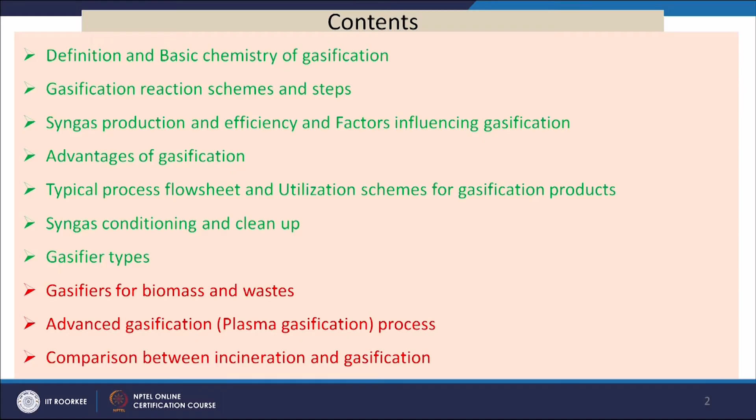In the second part we will discuss gasifiers for biomass and wastes and advanced gasification, that is plasma gasification process, which is very important for processing hazardous solid wastes, and we will make a comparison of different incineration and gasification processes in the second part.

Now we will see what gasification is. Gasification is a process that converts carbonaceous feedstocks into combustible gases including H2 and CO, mainly carbon monoxide and hydrogen rich gas, with a specific heating value, in the presence of a partial oxygen supply, typically about 35% of the oxygen demand of complete combustion, or suitable oxidants such as steam. The produced gas is called synthesis gas or syngas.

But if air is used in place of oxygen, a large amount of nitrogen is also present in the produced gas, and the gas is named producer gas. Syngas can be used for various applications including liquid fuel synthesis through the Fischer-Tropsch synthesis route.

In the earlier module we discussed that incineration (combustion), gasification and pyrolysis are the main three routes under thermal processing of solid waste. In incineration we need excess oxygen, in gasification we need controlled oxygen, and in pyrolysis we do not need oxygen.

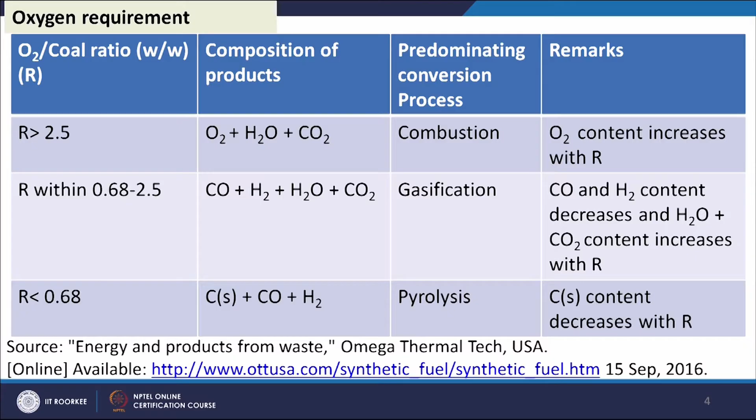So if we put some solid waste with air or oxygen, depending on the ratio of oxygen to feedstock, a particular process will predominate. One guidance is given in the source 'Energy and Products from Waste': for oxygen to coal ratio (weight by weight), defined as R, if R is greater than 2.5, the produced gas will contain oxygen, H2O and CO2, and the process will be combustion.

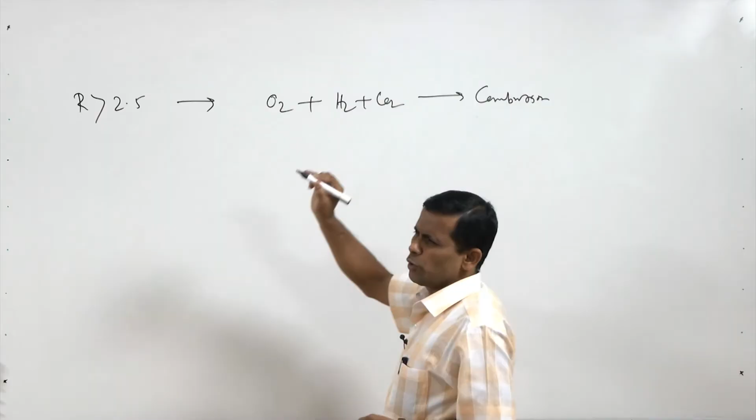Interesting to note that if the R value increases, excess oxygen will also be available in the produced gas. If R is between 0.68 and 2.5, the produced gas contains H2, CO, CO2 and H2O as major components, with possibly other impurities, and this is the gasification process.

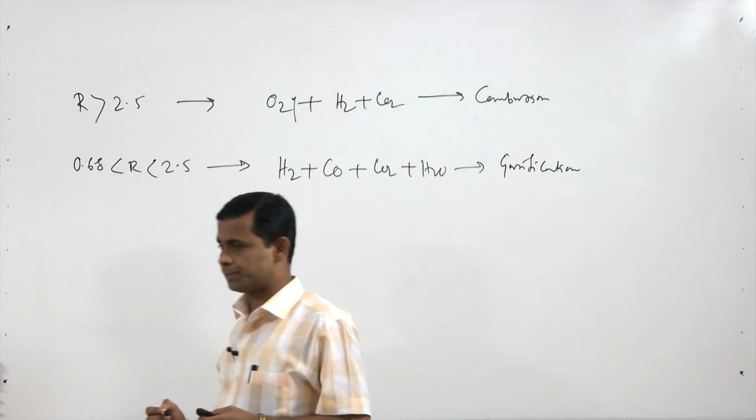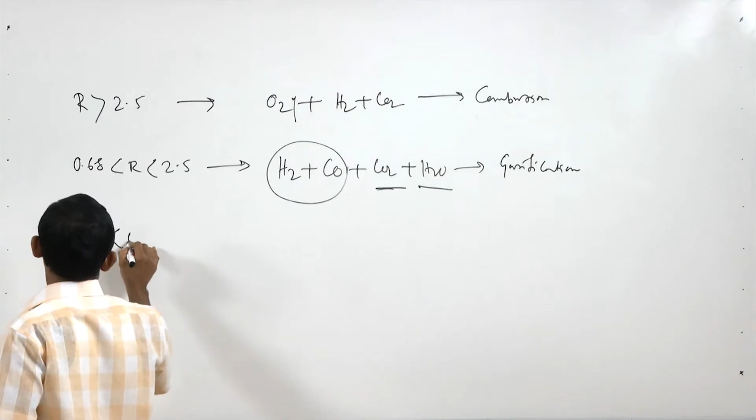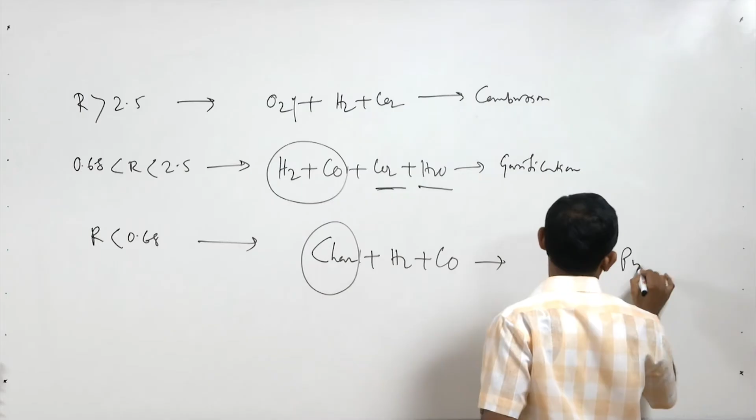Gasification predominates in this range. If we increase R, CO2 and H2O will increase while CO and H2 will decrease. If R is less than 0.68, we will get char along with H2 and CO, and the char yield will increase as R decreases. In this case, pyrolysis is the predominating route for conversion.

Now we will see the basic chemistry of gasification. This basic chemistry involves reactions of elemental carbon present in the feedstock with different agents like oxygen, carbon dioxide, H2O and H2. So carbon will react with oxygen to give CO, with delta H negative.

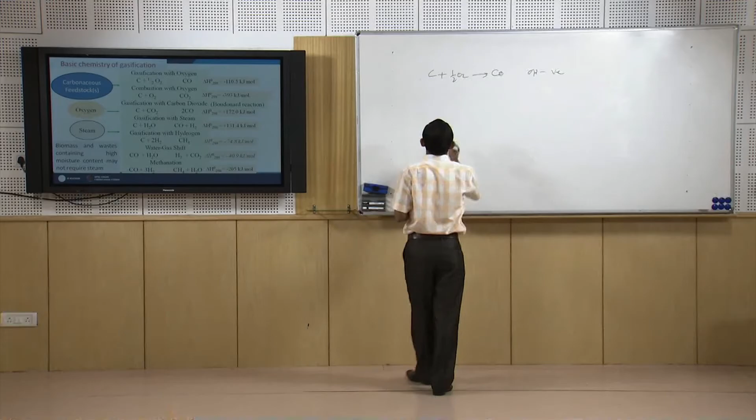This is called gasification with oxygen or partial oxidation. Then combustion with oxygen: C plus O2 gives CO2, with delta H negative. C plus CO2 gives 2CO, with delta H positive. C plus H2O gives CO plus H2, with delta H positive.

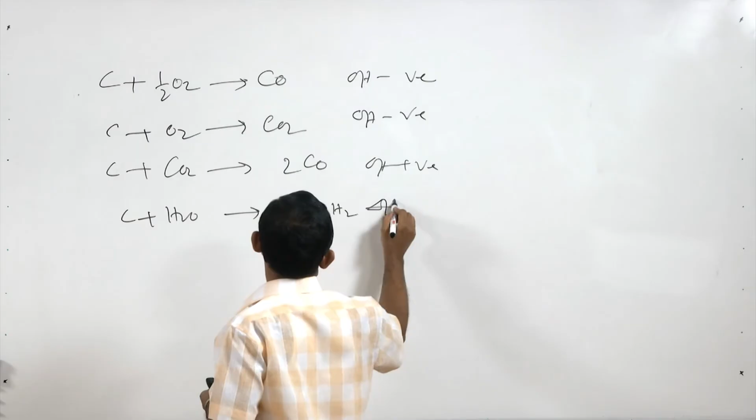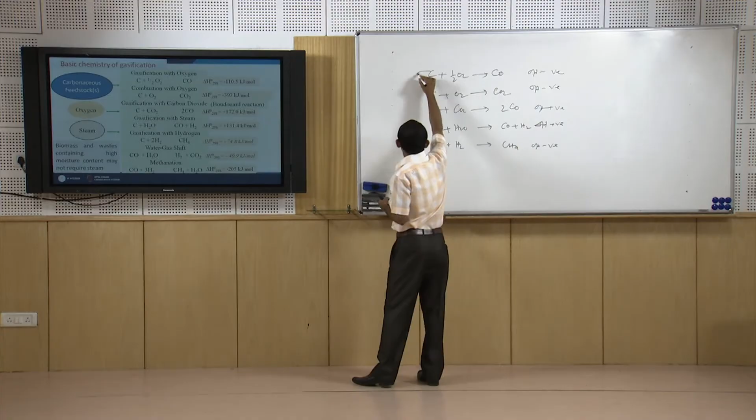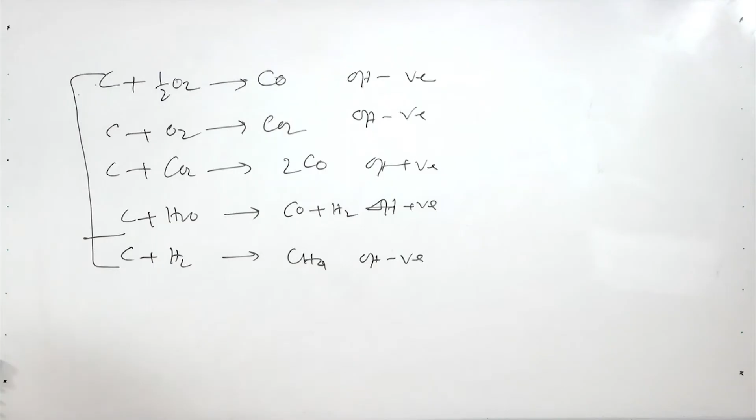Now gasification with hydrogen: C plus H2 gives us CH4, del H is negative. Apart from this, these are the basic reactions - methane formation as a side reaction, and water gas shift reaction also takes place in the gasifier, that is CO plus H2O reacts and converts into H2 and CO2, del H is negative.

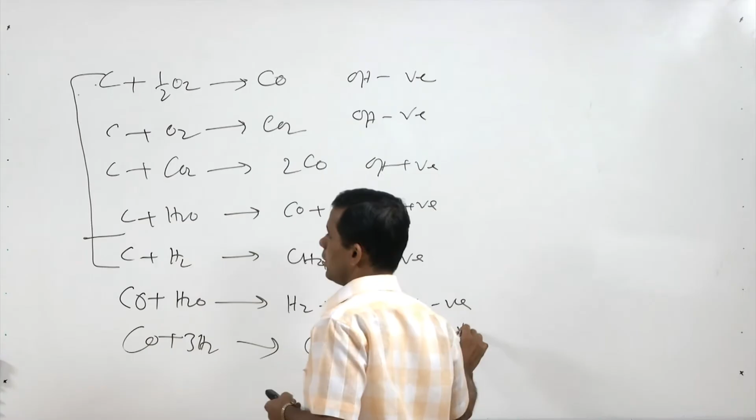Another reaction is methanation: CO plus thrice H2 gives us CH4 plus H2O, del H is negative. So these are the major and minor reactions involved in the gasification of carbonaceous feedstocks in presence of oxygen and steam.

Now, if coal is used where the oxygen is less, then steam is required, because coal also has less moisture. But waste and biomass normally contain higher moisture content and oxygen content, so the steam requirement is less, and in many cases steam is not used at all.

So this is the elemental reaction we expressed when oxygen is used. Now if air is used, the same reactions go on, but additional nitrogen also comes into the gasifier and is present in the produced gas, giving the producer gas. This reduces the heating value of the produced gas and increases its nitrogen content.

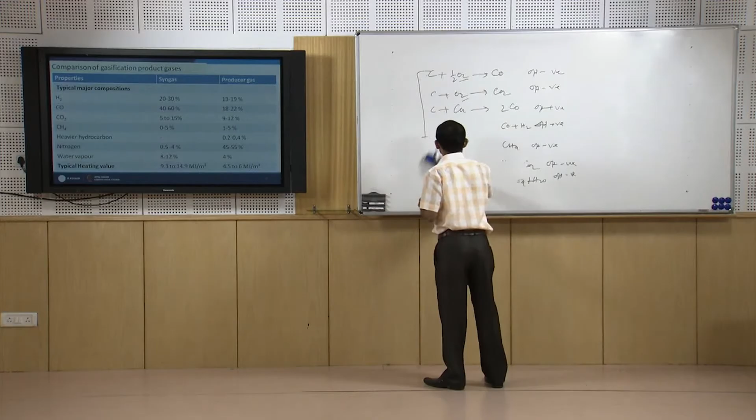Now we will see the difference between these two gases: one is syngas when oxygen is used, and one is producer gas when air is used. If we consider the composition - hydrogen, CO, CO2, CH4, heavy hydrocarbon, nitrogen, water vapor, and heating value - these are the compositions we will compare.

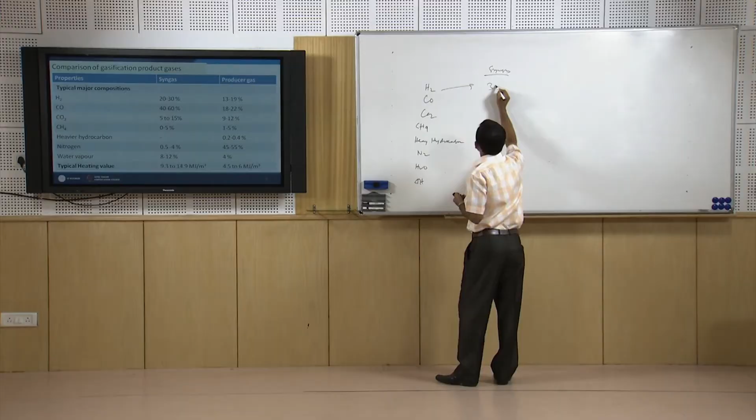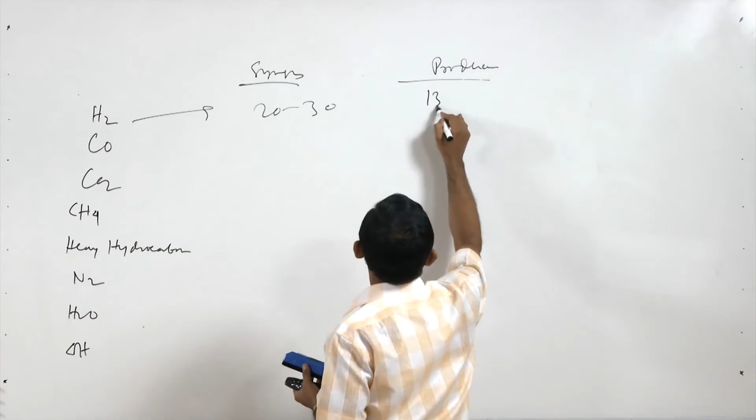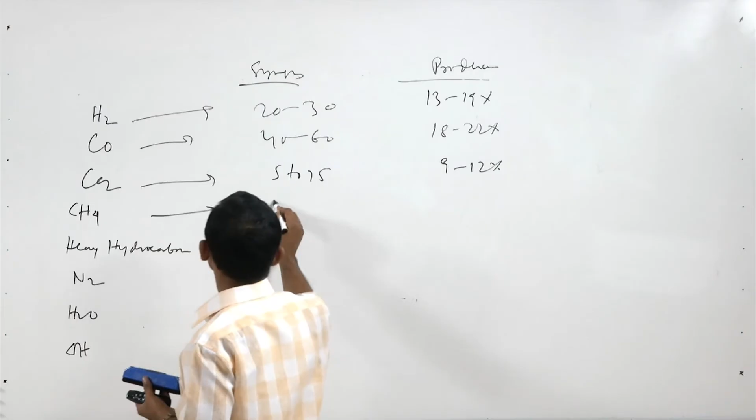For syngas, hydrogen is typically 20 to 30%, and for producer gas it is 13 to 19%. For carbon monoxide this is 40 to 60% and only 18 to 22% for producer gas. Carbon dioxide is also less, 5 to 15% versus 9 to 12%. CH4 is 0 to 5% versus 1 to 5%. Heavy hydrocarbon is 0.2 to 0.4%.

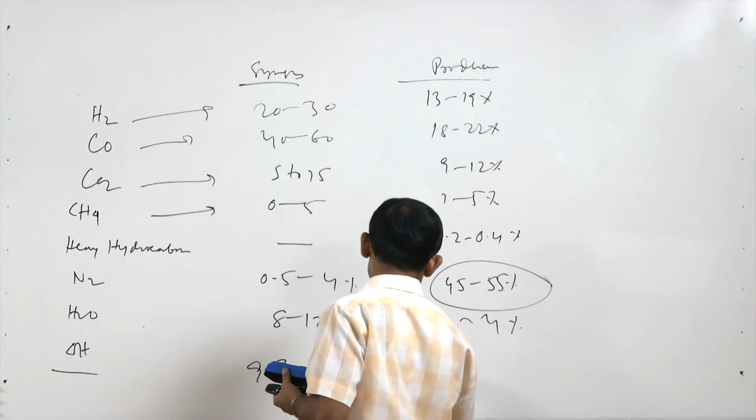Nitrogen in syngas is very less, 0.5 to 4%, but in producer gas it is 45 to 55%. This is very interesting and highly different, this nitrogen content. H2O is 8 to 12% versus around 4%, and the del H value for syngas is higher, 9.3 to 14.9 megajoule per normal meter cube, whereas for producer gas it is only 4.5 to 6 megajoule per meter cube. So the heating value of producer gas is less with respect to syngas.

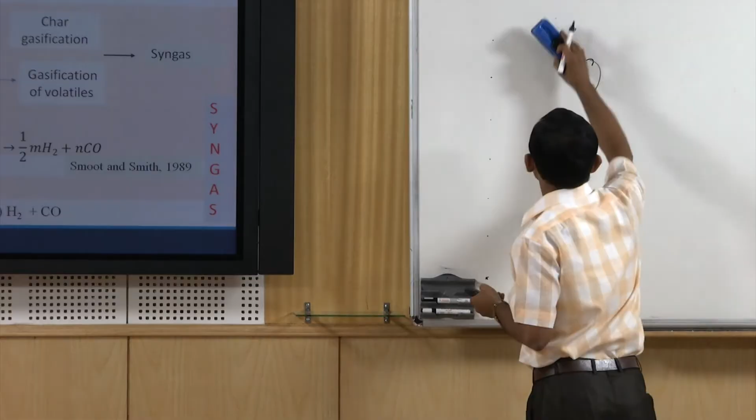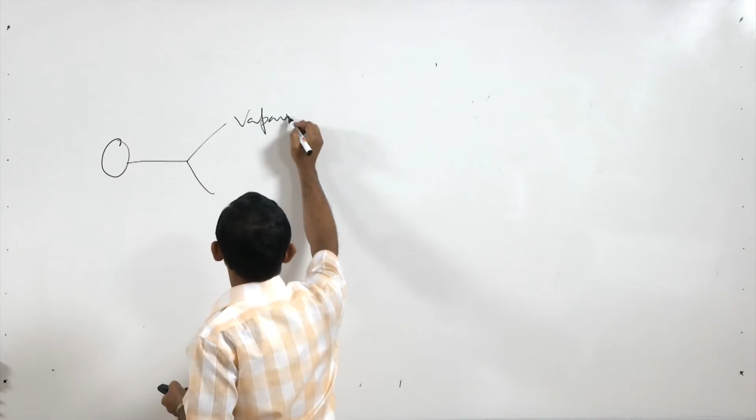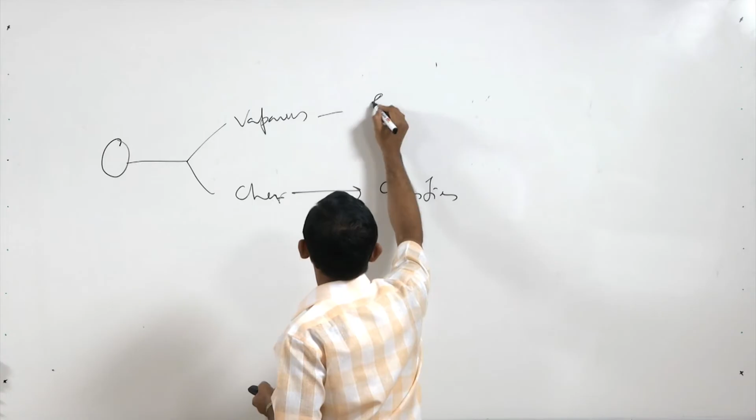Now we will see reaction schemes. So far we discussed very basic chemistry on the basis of elemental conversion, considering only pure carbon with no impurities. Here we will discuss more representative schemes: first the feedstock comes in contact with hot gas, devolatilization takes place giving some vapors and char, then char further gasifies and gives the syngas, with application of heat.

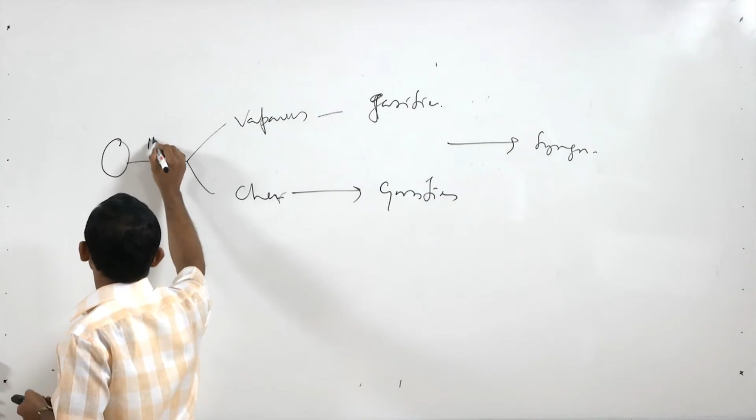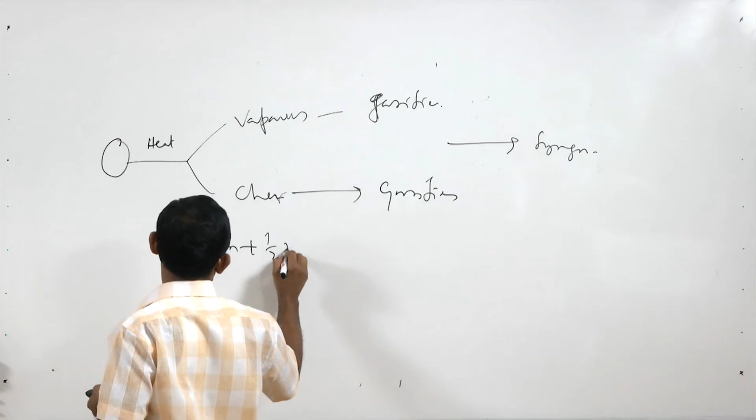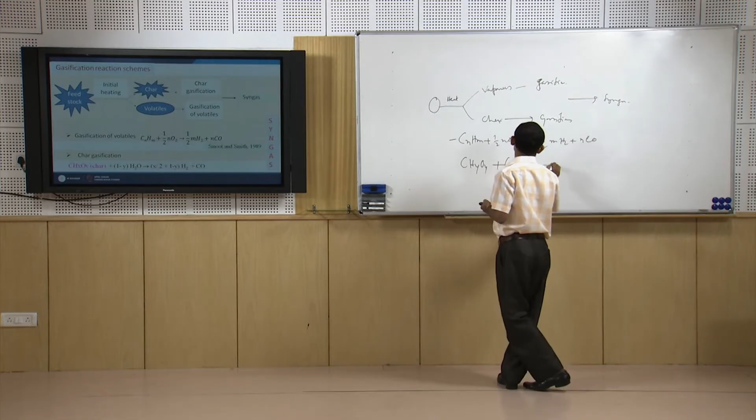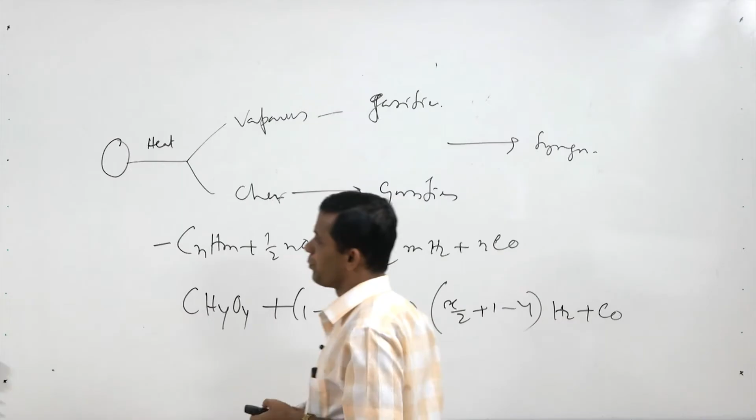Volatiles gasification reactions: for this, CnHm plus half n O2 gives us half m H2 plus n CO. And char gasification: CHxOy, this is char plus (1 minus y) H2O, that gives us (x/2 plus 1 minus y) into H2 plus CO. This was proposed in 1989.

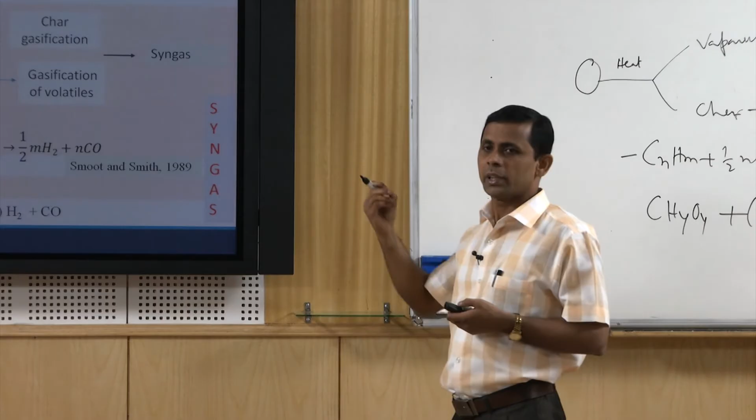A similar phenomenon happens in case of incineration. First the material comes in contact with hot gases and volatilization takes place. In incineration, the volatiles oxidize or combust with secondary air, but here we are not providing any secondary air - only a controlled amount of oxygen is provided, so the reduction or gasification reactions proceed.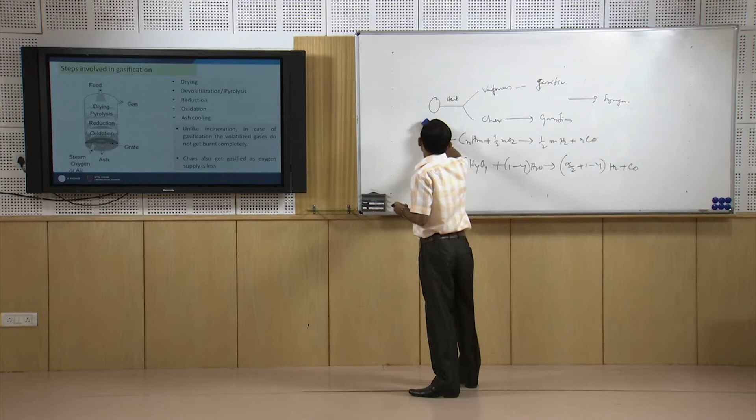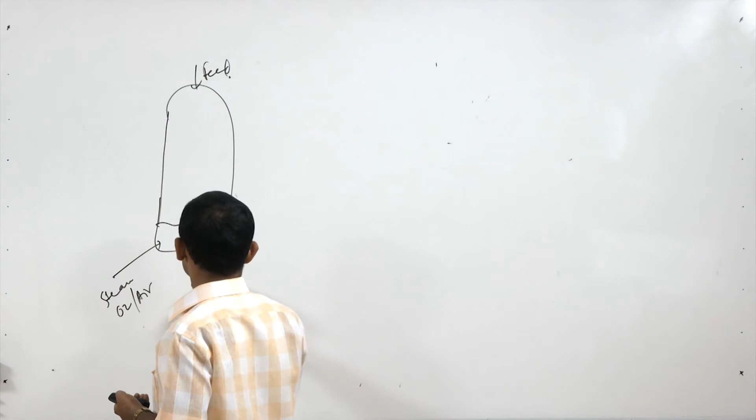If we take a reactor or gasifier, how the different zones are distributed is shown in this figure. Take a fixed bed gasifier: from the bottom we send steam, oxygen or air, from the top we put feed, and there will be a grate where ash is collected. So this material is falling down.

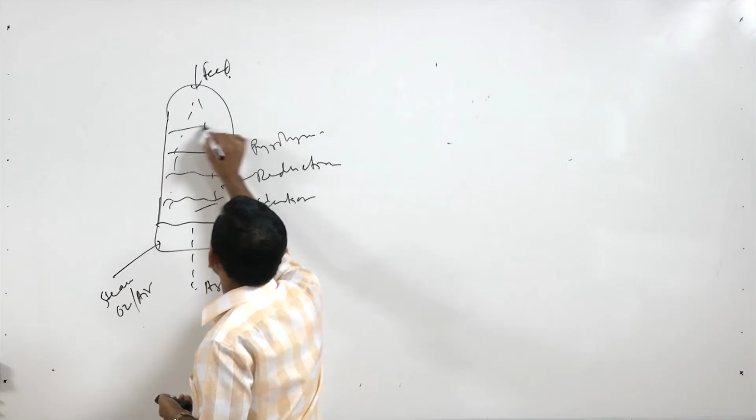There will be a combustion zone - oxidation, the highest temperature - then reduction zone, then it will be having pyrolysis, and this is drying. So these are the processes or regions we get in the gasifier.

This is very similar to incineration methods, but the only difference is that here the vaporized or volatile components do not get completely burned because oxygen is not there, and char gasification takes place in place of char oxidation.

So for what we have discussed, it is not clear how H2S and COS are produced during gasification, which are present in the syngas and cause serious operational issues. Valero et al. in 2006 proposed a chemistry for gasification, presenting the molecular formula of carbonaceous feedstocks and showing reactions with oxygen, CO2, H2O and H2, demonstrating it is possible to produce H2, H2S, N2, CO, CO2, CH4, etc.

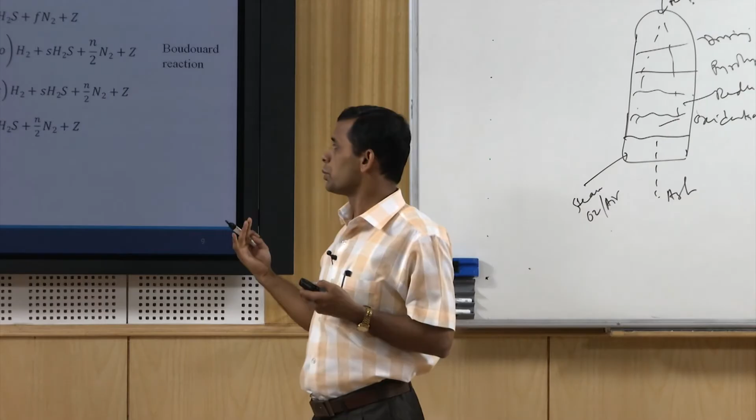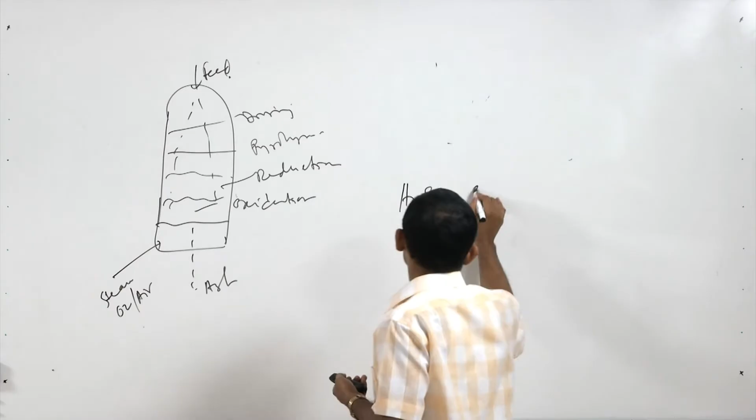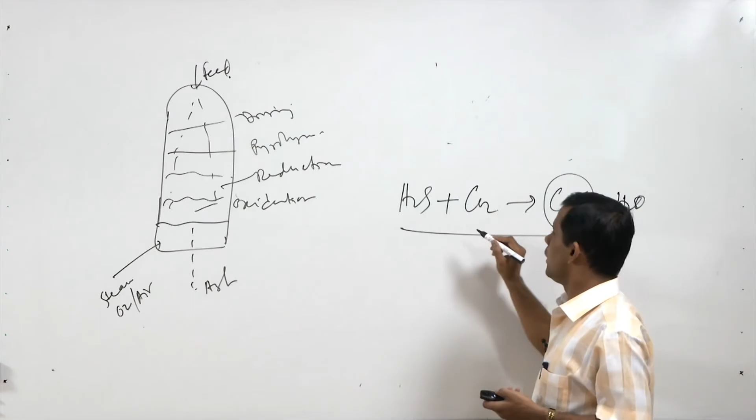It is also proposed that H2S, produced during the basic reactions, reacts with CO2 and converts to COS plus H2O. So this is the reaction through which COS is present in syngas, which requires cleaning because these components are not desirable - we have to remove these things.

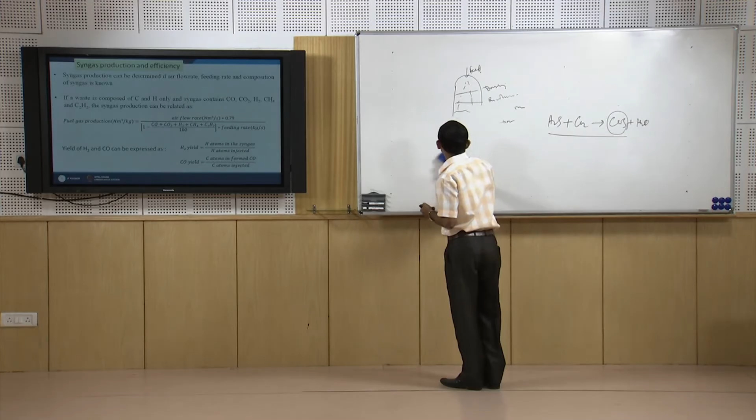Now we will see how we can calculate the amount of syngas produced and the thermal efficiency of the gasification process.

Gasification is a very high temperature process, so it is governed by equilibrium. Through equilibrium modeling and its simulation, we can predict the composition of syngas and the production rate.

Many people have tried to predict the composition. Here is a formula using which we can calculate the fuel gas production rate if the feedstock contains only hydrogen and carbon, and the product gas contains CO, CO2, H2, CH4 and C2H4 - this is fuel gas, syngas or producer gas, whatever it may be depending upon the situation.

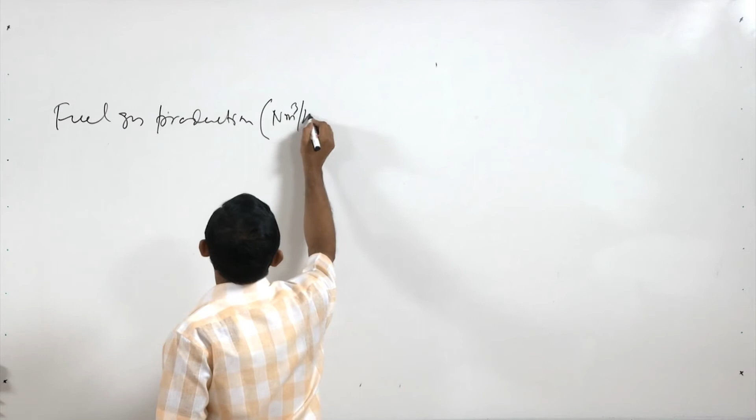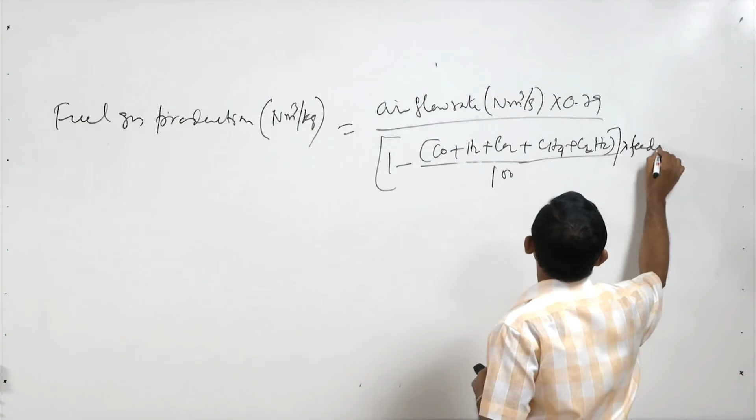So fuel gas production, in normal meter cube per kg of waste or carbonaceous material, is equal to air flow rate in normal meter cube per second, into 0.79, divided by 1 minus CO plus H2 plus CO2 plus CH4 plus C2H2 - this is the composition - divided by 100, into feeding rate in kg per second.

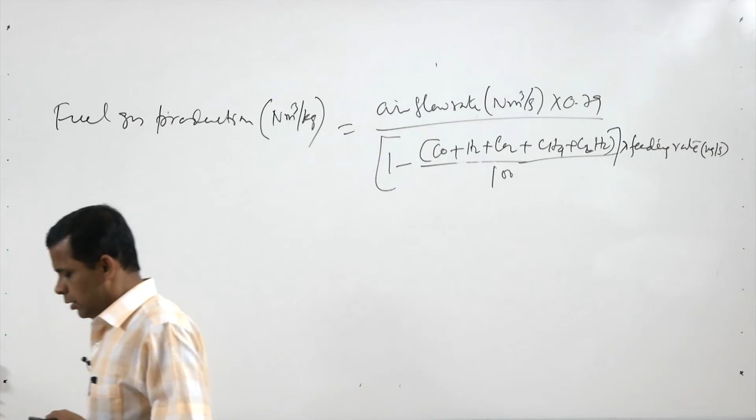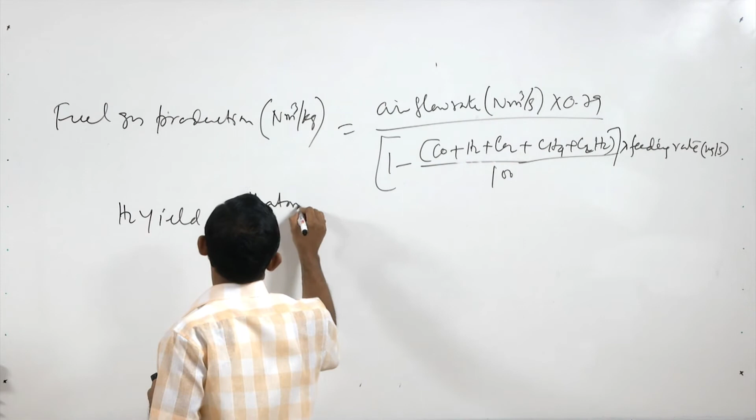Now hydrogen yield and carbon monoxide yield are also two important parameters. Hydrogen yield is equal to hydrogen atoms in syngas divided by hydrogen atoms injected, that is in the feedstock. CO yield is equal to carbon atoms in formed CO divided by carbon atoms injected, meaning in the feedstock.

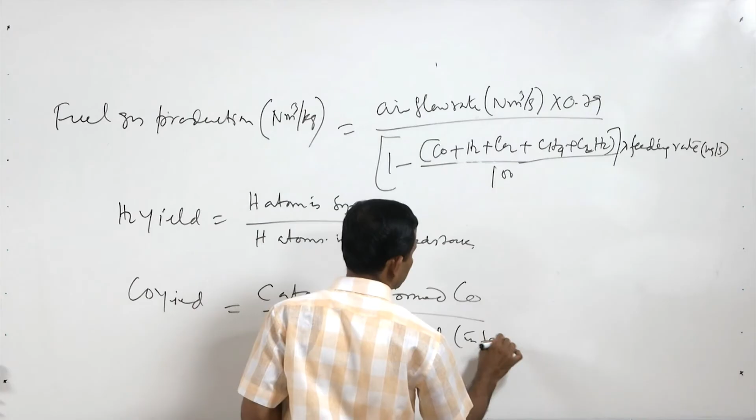So this way we can calculate the fuel gas production rate and the yield of hydrogen and CO. Now we will see how to calculate the thermal efficiency.

Thermal efficiency of this gasification process can be determined as: thermal efficiency is equal to heating value, lower heating value LHV of the produced gas, the cold gas, in kilojoule per normal meter cube, into fuel gas production in normal meter cube per kg, divided by...

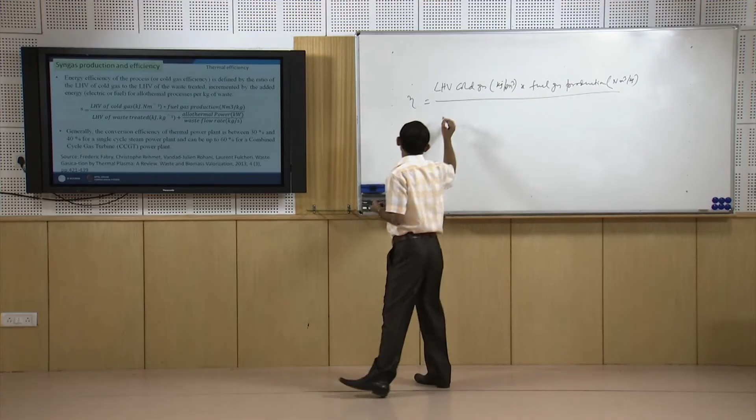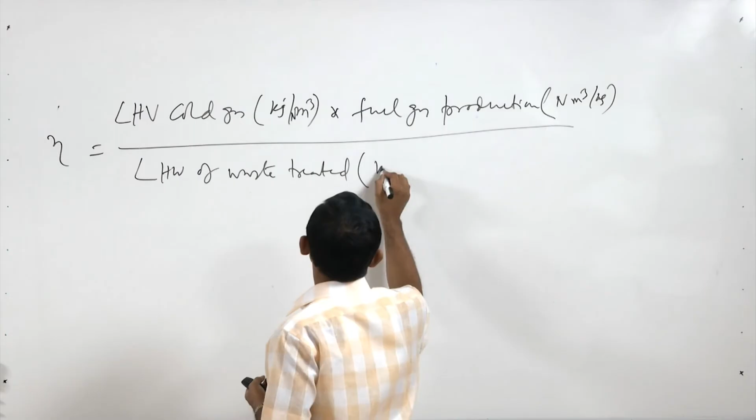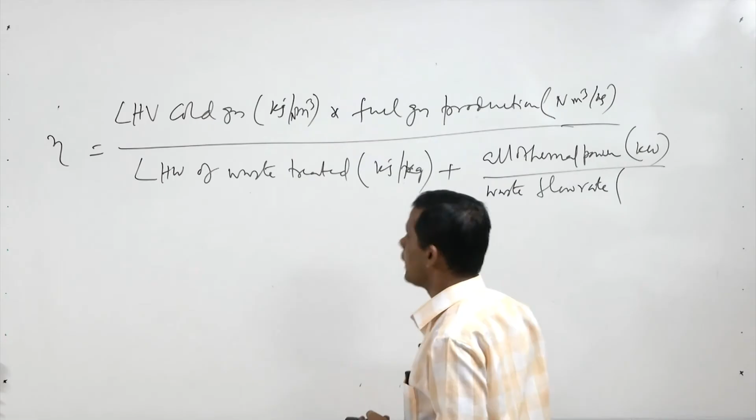...how much heat is available in the waste - that is LHV of waste, in kilojoule per kg - plus additional energy required for the process, called allothermal power, in kilowatt, divided by waste flow rate in kg per second. This is the equation through which we can calculate the thermal efficiency of the process, or cold gas efficiency.

Generally conversion efficiency of a thermal power plant is between 30 to 40% for a single cycle steam power plant, and it can be increased up to say 60% for a combined cycle gas turbine power plant.

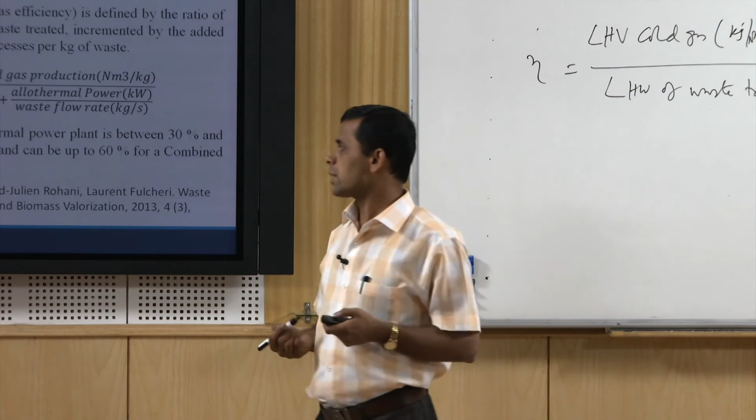Now we will see the factors that influence the performance of gasifiers or the gasification process. In combustion we have seen that time, temperature, turbulence, feedstock size, etc. influence the rate of combustion. Similarly, the performance of gasification will also depend on those parameters.

In addition, the type of feed injection - whether we are feeding from the top or from the side - will also influence the performance. The gasification agent, whether air or oxygen, will also influence the process. The type of heating, direct or indirect, will also influence the type of reactor used, fixed bed or moving fluidized bed, which will also affect performance. Temperature range and pressure are also important.

Now what is the advantage of gasification? This reduces CO2 in the emission, so CO2 emission is reduced. We get some intermediate step to control CO2 emission - this is the one major advantage. Apart from this, it requires compact equipment with a relatively small footprint, accurate combustion control, and high thermal efficiency.

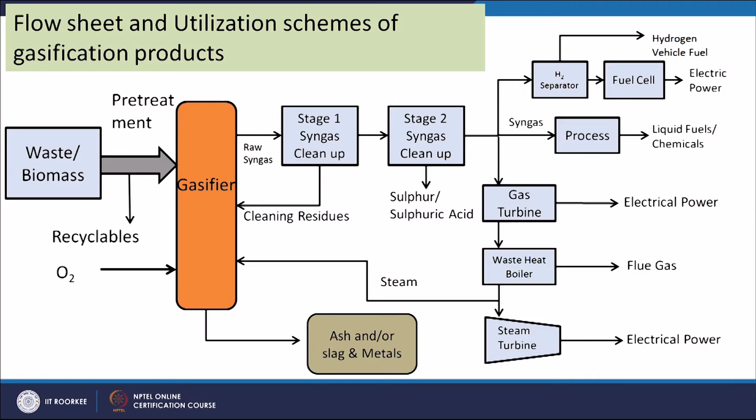Now we will see the flow sheet and utilization schemes of gasification products. Similar to incineration or combustion methods, we use waste, biomass or any carbonaceous material after pre-treatment. If the carbonaceous material is waste and biomass, pre-treatment is a must - segregation, sorting, homogenization is required - and then the material comes to the gasifier.

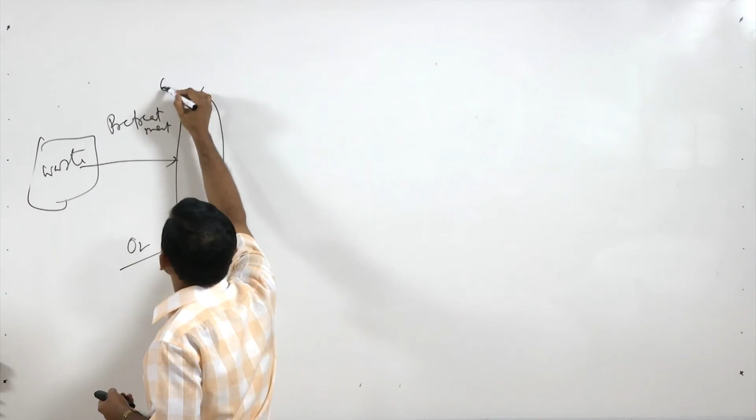So after pre-treatment, the waste comes to the gasifier. The gasifier supplies oxygen or air, and steam if required, depending upon the moisture content in the waste. Then it gives us syngas, but here the temperature is high - varying from about 600 to 900 degrees depending upon the type of gasifier used - and that will go out.

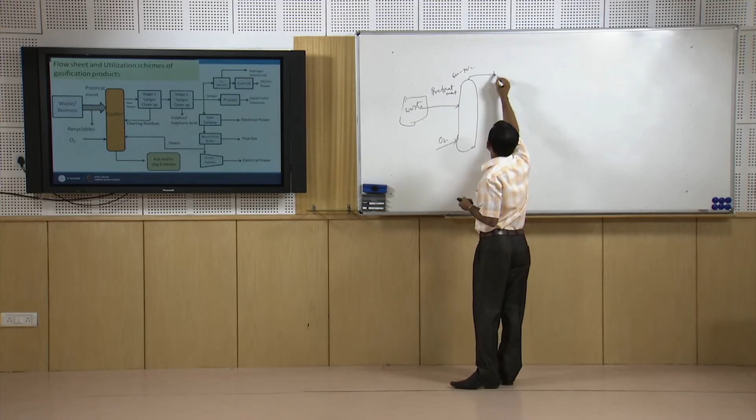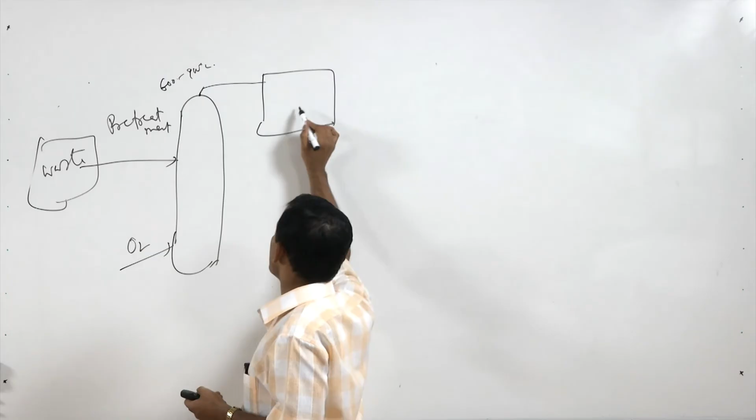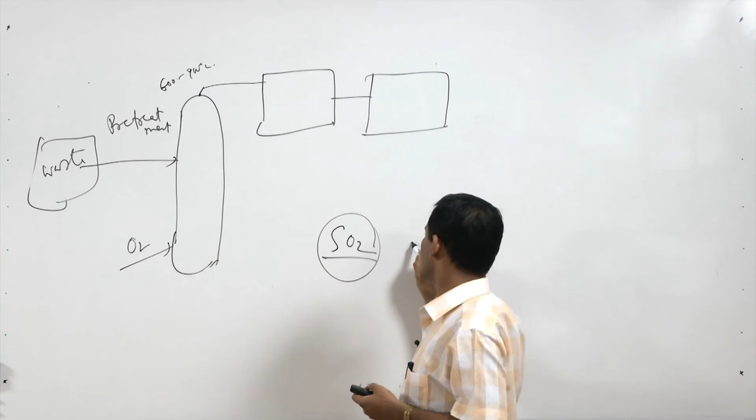We need to clean it. So the first step is syngas cleanup, done using cyclones - particulates carried over are settled down and can be recycled. This is the first cleaning step. Then in the second step we clean the acid gases present - SO2, H2S and COS. SO2 will not be present here, unlike in incineration methods. We will be having H2S and COS, so we have to remove the H2S and COS in this case.

After acid gas removal, we will be getting the syngas. That syngas can be used for different purposes. After the cleaning of the acid gas components from this syngas, this will be ready for utilization. Now, this can be used for various applications.

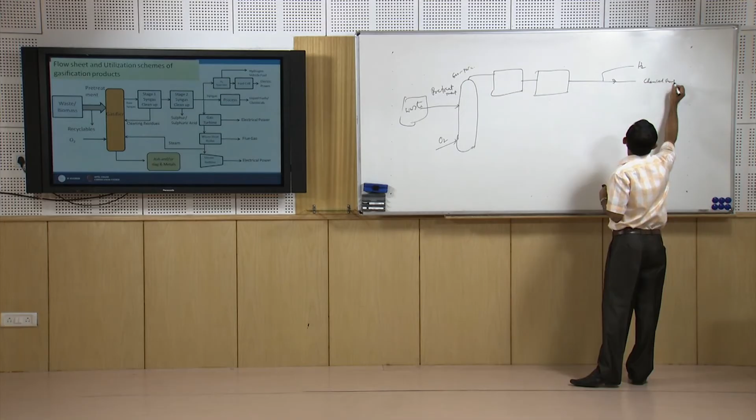It can be used for hydrogen production, it can be used for chemical synthesis, it can be used for Fischer-Tropsch synthesis for liquid fuel.

Then this can directly be used in a gas turbine, so that will give us electricity. Then the gas goes and the heat can be recovered and we use this gas for steam formation, so it will give us flue gas. After combustion it will be steam, water will be converted to steam, and that steam can further be used in a steam turbine.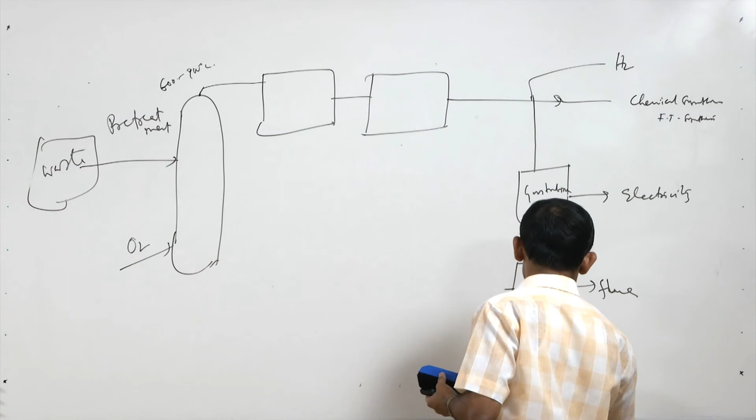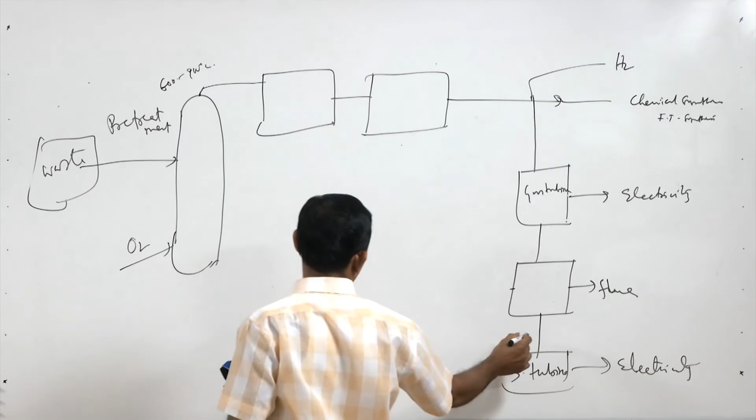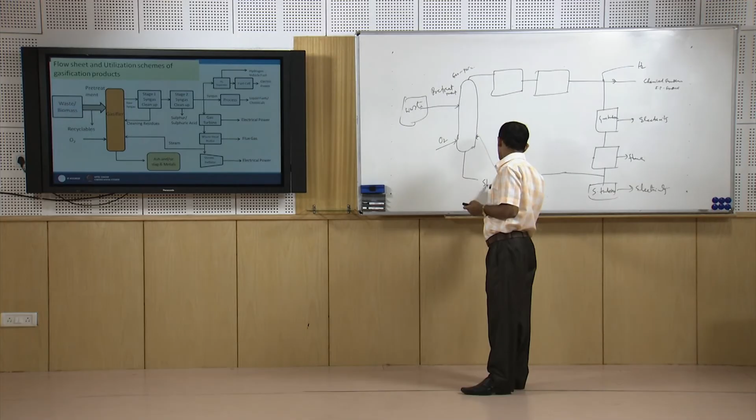Which will again give us electricity. And part of the steam produced here can be used in the gasifier if required, and from the bottom of the gasifier we will be getting the slag and ash. This can be recovered or managed in a proper way.

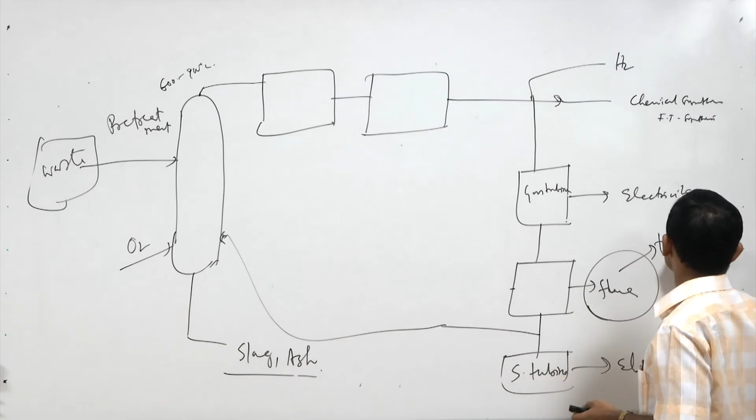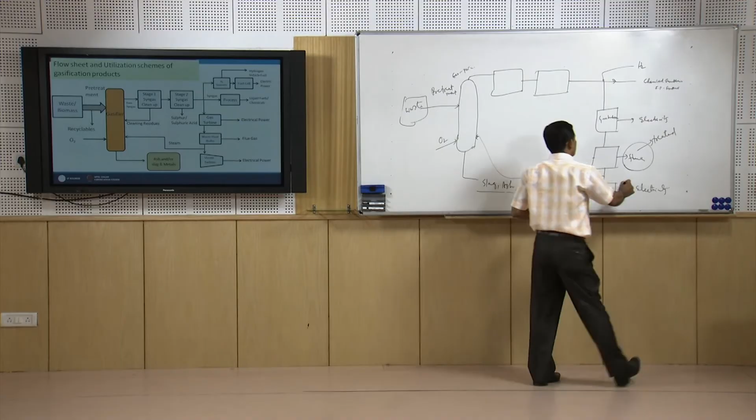Now, this flue gas which is generated here has to be treated, and we will be discussing these things in another module, and we will also discuss the scopes for different applications in detail in another module.

If we think about different applications, three important ones are hydrogen production and hydroprocessing, second is chemical, and third is power production. So power production, hydroprocessing and chemical production are the three major routes for the application of syngas, but for the downstream applications in these three routes, the quality requirement is different.

For power applications, the quality requirement basically on sulfur is that it should be less than 10 to 15 ppm. For hydroprocessing, the sulfur content should be less than 1 ppm, and for chemical this should be less than 0.01 to 1 ppm. So that has to be very pure.

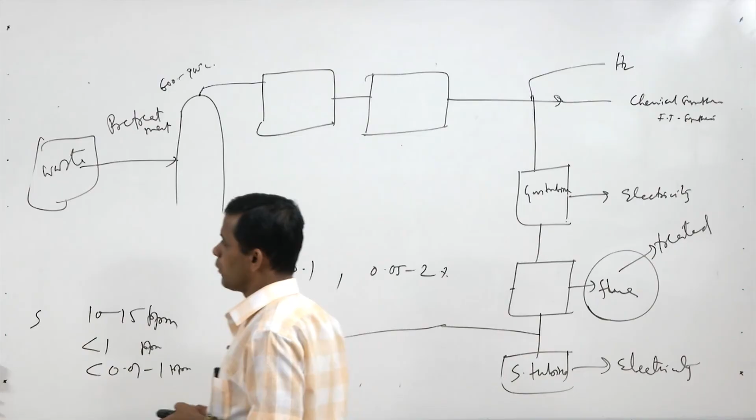But for carbon dioxide and carbon monoxide, for power application there is no limitation, it can have any value. For hydroprocessing, the carbon dioxide should be less than 0.1%, and for chemical it will be within 0.05 to 2%. For carbon monoxide, if it is for hydroprocessing, less than 50 ppm on a weight basis, and for chemical synthesis the CO requirement will depend upon the process, because different processes require different H2:CO ratios in the syngas.

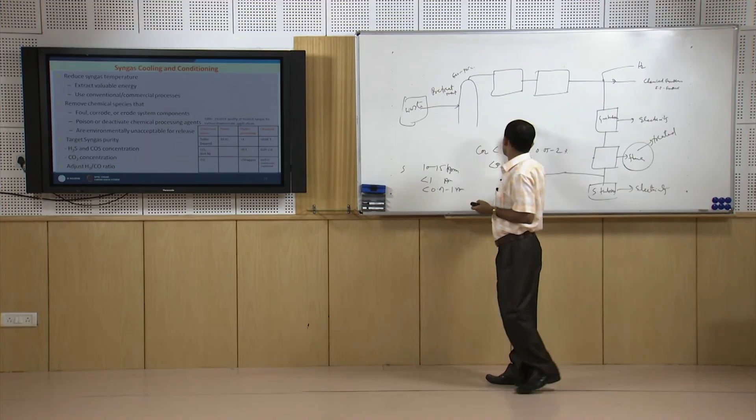Somewhere the required ratio is 2:1, like Fischer-Tropsch synthesis, somewhere it's 1:1, like DME synthesis. So depending upon the nature of the chemicals we are going to produce, the H2/CO ratio is required. To maintain this ratio, we need to condition the syngas.

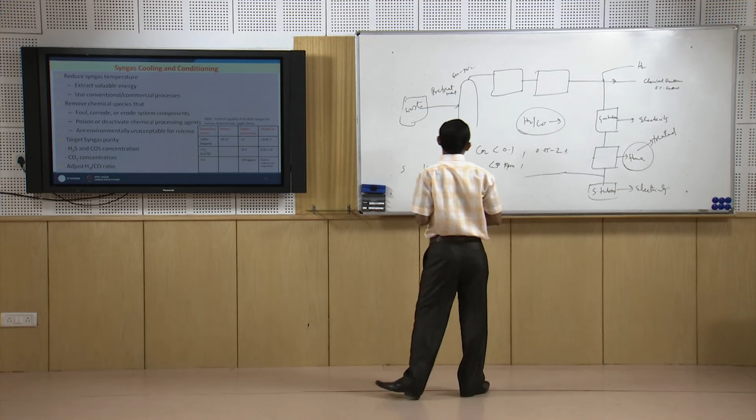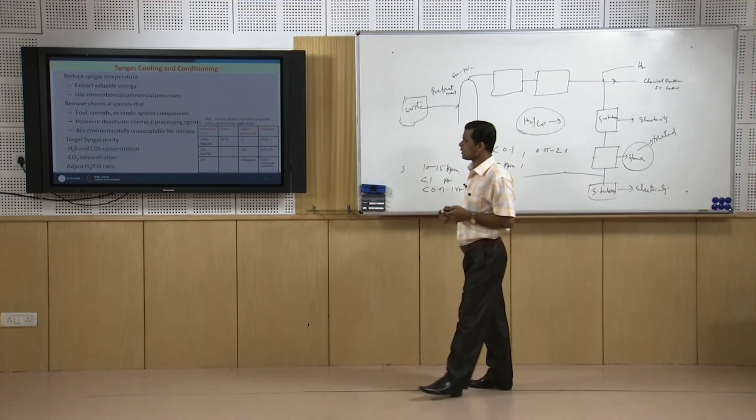That means some other reactions are carried out with the syngas to control the H2/CO ratio, and cooling is required because syngas is at very high temperature, as I mentioned. So for different applications the temperature has to be reduced. This is the flow sheet we have discussed.

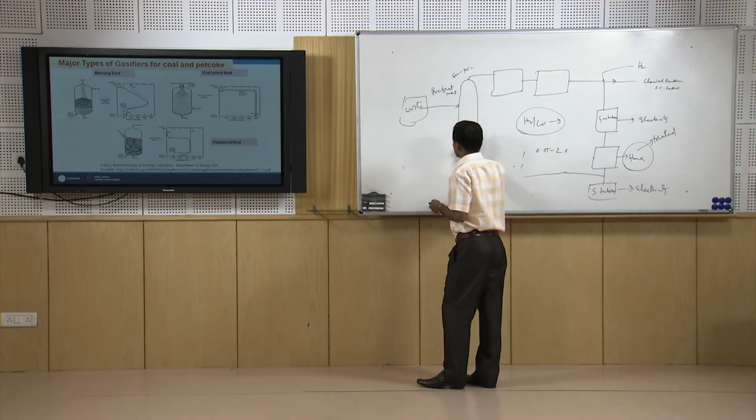Now we will see some important types of gasifiers used in coal gasification: fixed bed, fluidized bed and entrained bed gasifiers.

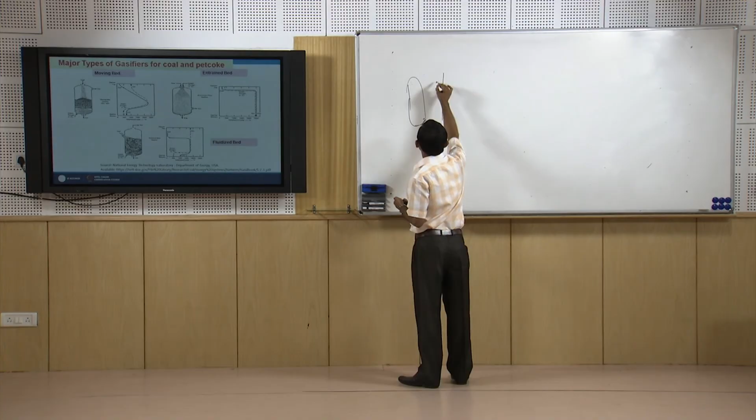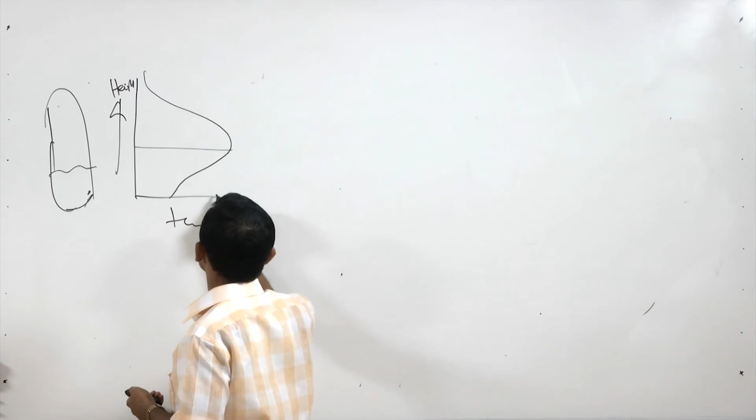If we think about the three gasifiers and look at the temperature distribution along the height for a fixed bed: this is the height of the gasifier, this is the temperature, and this is the combustion zone. The maximum temperature will be here, and that will be reduced elsewhere. This is the ash zone, this is the combustion zone with maximum temperature, around 1800 degree centigrade. This is for fixed bed.

If it is a fluidized bed, material is put in from the side. Here the temperature is less, maximum temperature is inside. So with height, the temperature distribution will be uniform, this part will have uniform temperature distribution throughout.

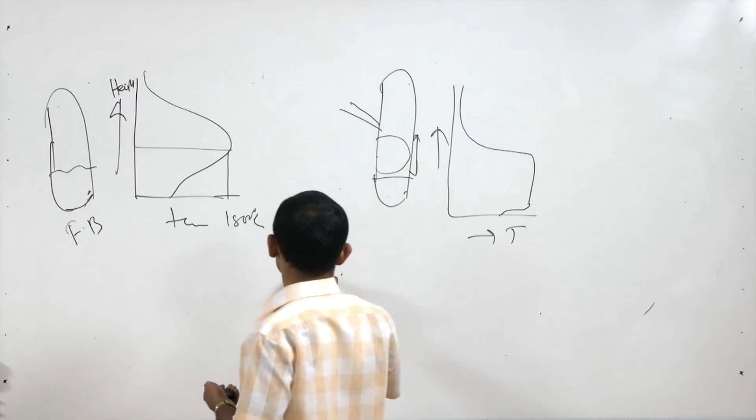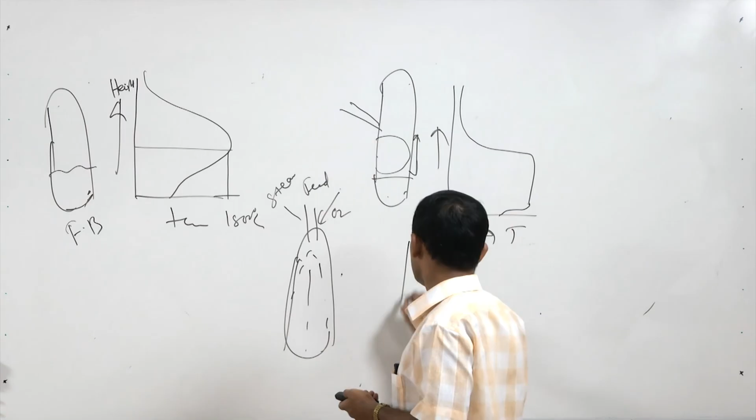And if it is entrained bed, meaning the reactor where we put the feed, air, oxygen and steam from the top, in this case the temperature will be distributed uniformly throughout the length, but it will be very high temperature from the beginning.

So these are the three main types of gasifiers used for the gasification of different carbonaceous feedstocks, particularly applicable for coal and pet coke. The entrained bed gasifier is most suitable for less reactive material. The same types of gasifiers are applicable for the gasification of waste and biomass, but operating conditions will be different.

So after this, in the second part of this module we will start with the gasifiers for biomass and waste.